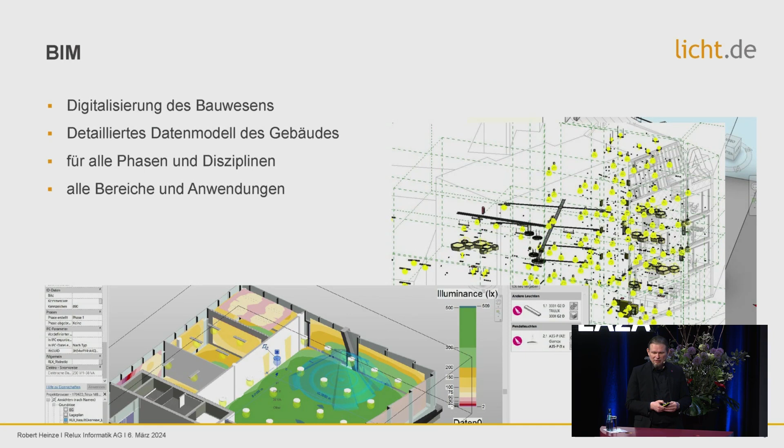So the design process includes many people normally, and they can interact or collaborate with each other in a much better way, or much easier. So this is the theory behind it, but practical examples have shown that it actually works. Communication stays the same. BIM is not something that replaces communication between people. We need to talk about the plan, the design in general, but we've got more sophisticated tools for the design process than we had 20 years ago.

This is how a BIM process works. There are several standards that describe a BIM process. ISO 19650, for example, and this is the last standard that I would like to mention. But for those of you who want to take a deep dive, feel free to have a look at this standard, because this describes the BIM processes.

The great thing about the processes for the entire design process, not only for lighting design, is that at a very early stage, you have to design the entire design process. This is called EIR, Exchange Information Requirement. This is what it's called in English. And this is something you have to deal with from scratch at the very beginning of a project. You have to talk about this with your clients, with your customers.

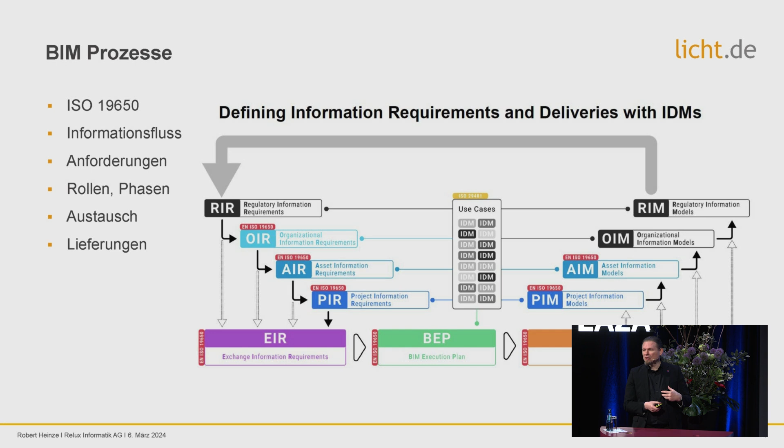What do we want to do? What kind of software are we using? What kind of data format? What are the tasks of the individual trades? And at a very early stage of the design process, this is what has to happen. So you have to think about this, talk about this from a theoretical point of view, but this is part of the practical work today.

GLDF has already gone live, and it was published a couple of years ago already, and gldf.io. The systems that are used today can already read it. You only need to generate one data set per lamp as a manufacturer. So this is a great development. It actually works. And it's great to see that it works. So this gives us the opportunity for a structured data exchange for lights.

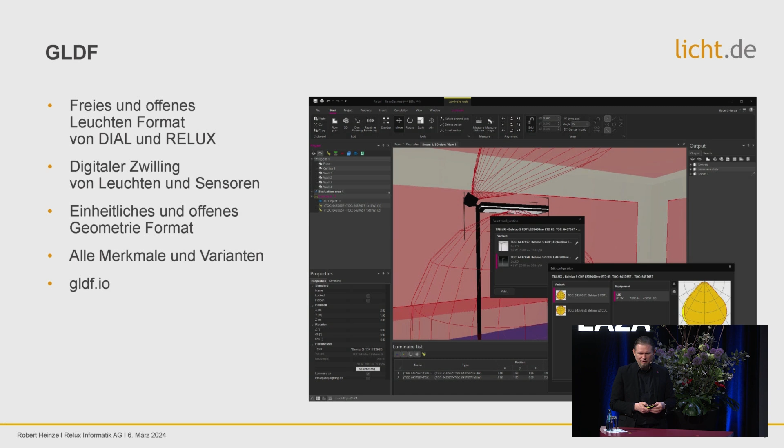For lighting. Lighting is not everything when it comes to a building, but it's one important factor for our industry, of course. Then we deal a lot with renovations at European level. We've got so many old buildings here that we need to renovate, and you should use the main structure of the building. I was a bit skeptical about that. So I wanted to find a way how to use your existing model in your BIM model, in your authoring system.

How can you do that? Do you have to scan the room with your mobile phone, or how does it work? But there are mobile phone scan apps that can really scan the entire room already. So we work with AI systems like the one you can see here from Amrax, which is a young company from Austria.

And they developed a tool using AI pipelines to generate a structural model like you want to have it in your BIM model. So it is not individual vectors. It is walls, windows, doors, chairs, tables as individual data objects. So it generates individual 3D objects of tables and of chairs that you can use as a light designer.

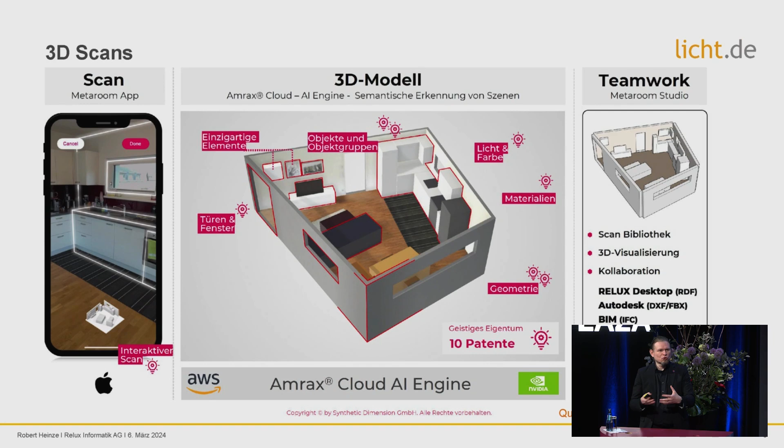You can just, for example, have a look at all the chairs. You can delete them. You can touch them. You can have a look at all the windows, change the properties. And this is a new way of working, which makes the design work pretty easy, pretty simple. And it works better every day. This is what I wanted to show you.

What about BIM lighting design? What about digital lighting design, using a digital data set of a building? We've got different input opportunities on how to generate a data model. IFC, for example, is a great data exchange format which is open and free to use for everybody.

This is great progress, but IFC has some limits because it's a hierarchy without a fixed authoring system. So you don't have a superordinate program, but all the other programs can use it alike. So for a light, for example, you've got a certain photometry, but you only get 48 characteristics in the IFC. A light has up to 500 characteristics or properties to describe it. IFC has some minor gaps or defects that can be compensated with other systems.

And we started in the lighting design with a BIM model, using an authoring system like Revit. We took the data model and transferred it to Relux and our other lighting calculation programs. So the BIM model is transferred to the software that you are using, so you don't have to copy the model again. And this is a huge relief for all the expert planners, for all the designers. You don't have to copy the model.

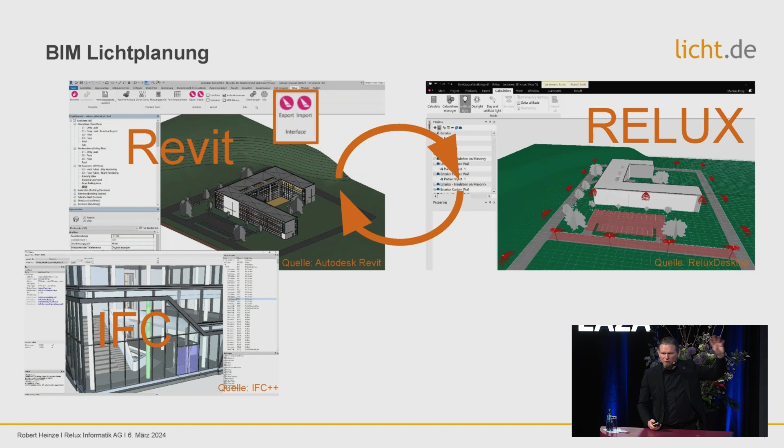And it also works the other way around. You can export it from your design program to the authoring system, and then just add the lights, and you end up with your result integrated in your building model. And it's been working pretty well for years already. This is part of your everyday life. These are our practical use cases. This is state-of-the-art technology, and it works.

What's next? What we have further developed at Relux is the following. We asked ourselves, why do you have to jump back and forth from authoring software to a lighting calculation program? Especially for electrical, it would be much easier if they could do their lighting design in the authoring system, for example, in Revit. So we developed a plug-in including all the task areas and measuring points, a grid that you can define.

You've got an overview of the room. You've got an efficiency method that you can use to select the right quantities. So everything that you can do in a lighting design program can be done in a BIM authoring system, as you can see here with Revit. So it works pretty well. We've got emergency lighting calculation.

So if you're familiar with Revit and the authoring system in general, if you have your model there, you can continue with your design in there.

If you are not familiar with lighting design, this might be interesting for you as well. For example, for electricians or others who have to deal with lighting design once a year, so they don't have to use two different programs and jump back and forth between Revit and Relux. They can do it all in one system, one software. So this is just one option on how to integrate that.

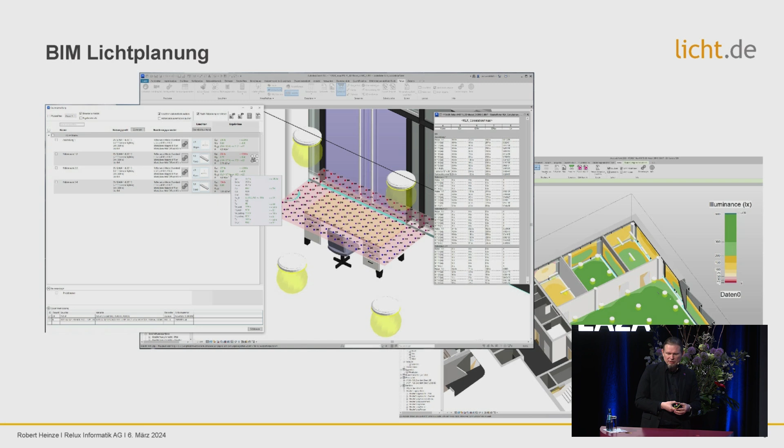But it depends on what you want to do, or what system you're using. If you don't have Revit, if you don't have any Revit models, then it doesn't make sense to just set up a Revit model for lighting design. So this has to do with communication, interaction between the different trades. They have to work hand in hand throughout the entire design process.

If you start as an electrician setting up a Revit model, a BIM model, just to do your lighting design, then this means more effort for you than just using a standard lighting design program. But this is growing. More and more BIM models are available, also from renovations or from existing old buildings. And this is the way forward - an easy way to exchange data between the trades.

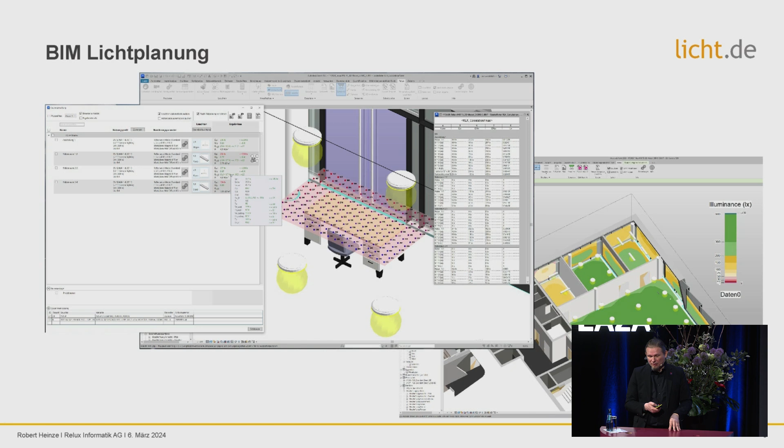Next logic step following digitization is automation. So if you've got everything in digital version - your building, your lights, your tools - the next step would be automation.

It is kind of so you just push a button and then you get all the characteristics, all the features, all the properties from the system.

And if you then realize that it's not compatible with the standard - because this is something you have to check as a human being, like ticking a box - or if you realize that something's in the red and you need to add another light, change the type of light, adjust your measuring grid to make it work, you just have to make sure that you complete several loops before you got a finished lighting design.

Well, as human beings, we are pretty good at it. We don't always take a look at all the characteristics or the most suitable product, but automation is a very good way to ensure this.

Relux published a product for street lighting. This is a bit simpler from a mathematical point of view because you only calculate the direct share, and this is relatively simple - you take into account distances. You can do this based on an Excel file, for example, and the results are identical because mathematically it's pretty simple. For street lighting, you only take into account the direct share.

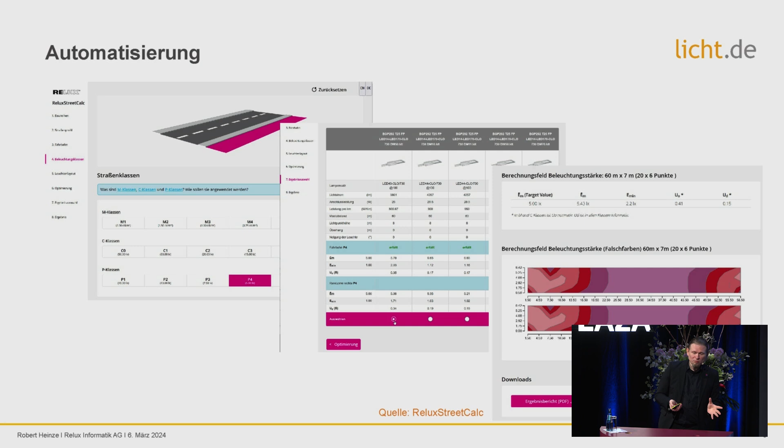So you can adjust a lot when it comes to street lighting. You can adjust the lenses, the light flows. You've got numerous photometric properties, different flows and streams that you can use, and these tools help you find the best suitable lamp or lighting system for your road.

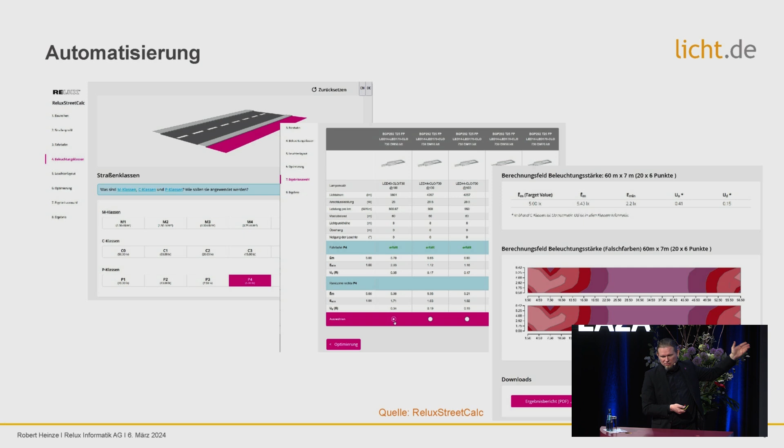Then you have to select the best one amongst the top 5 results, mast distance or clearances between the masts and so on, and you get a photometric proof with all the colors, TI values, and so on and so forth. You can print it easily, and then you're done with your lighting design.

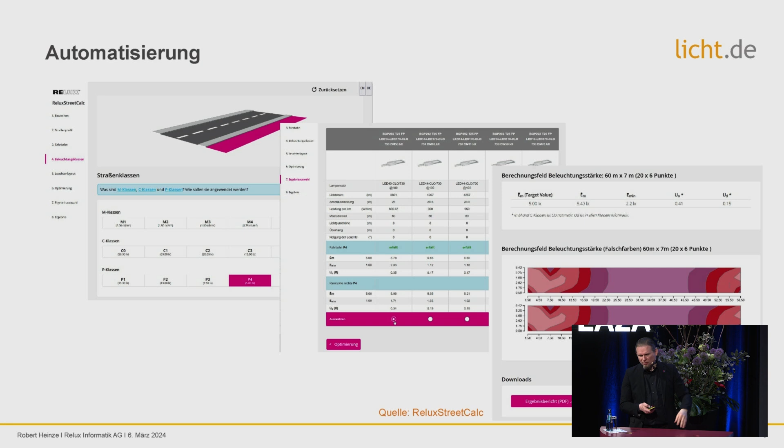So with a small online process, it works very well for street lights. What we are doing at Relux in our labs, we do the same for interior lighting. We developed a product that automatically does the positioning of the lights within a room. We've got an AI module.

This should actually be a video, but it doesn't work, unfortunately. It looks a bit boring, but we've got a module that scans a room and positions hundreds of lights in that room. The quantities and positions are optimized, and then you get a list of results with all the lights that are not compliant with the standard. There are hundreds of lights that work for this room, and hundreds that don't.

So you get a table, a list of lights, and then I can select the most efficient ones. You can sort them, filter them, and take the ones that are most suitable from a quality perspective. You can filter them by certain characteristics or features to really find the most efficient or glare-free solution for your room.

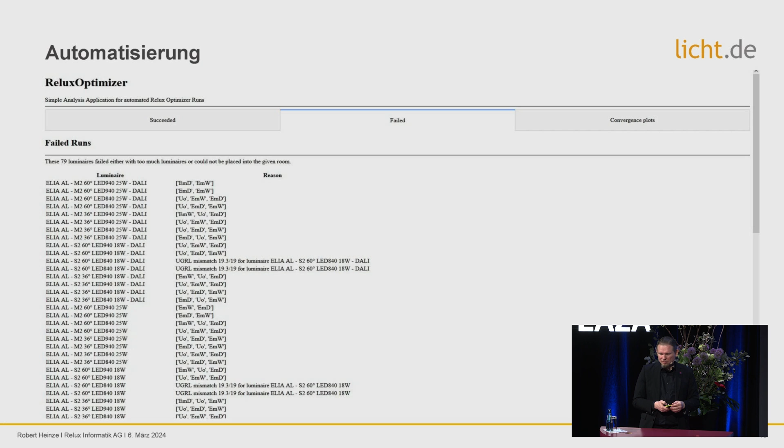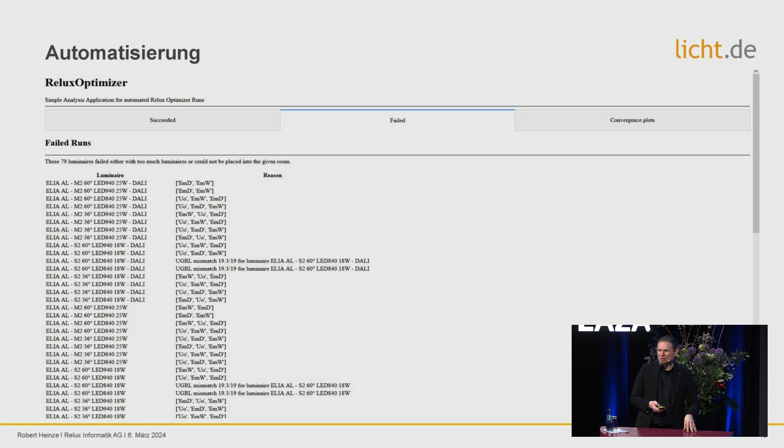And you immediately get the photometric proof for this that you can print right away. So it's also possible for indoor lighting design, and this makes our lives much easier. It's just for standard applications, standard design processes, for ideal light situations. So it only works for standard designs. I have to make this clear again.

Next example, this also works with a great data model. So if you get more and more data from the buildings, from the furniture that's in the building, you can use the data to visualize them, to visualize the building.

For Relux, we call it real-time rendering. Others might call it differently. But this is a module that we built on our own with Enscape, a small company based in Karlsruhe, and they are specialized in BIM models, constructive models that don't look much pretty.

They don't look really pretty. There are no wallpapers, for example, or surfaces, no finishes or finishing touches displayed in the BIM models. It is not a visualization model. It's just a model used for the design process, like a CAD drawing. No wallpapers or colors are included. It's just about the technical properties.

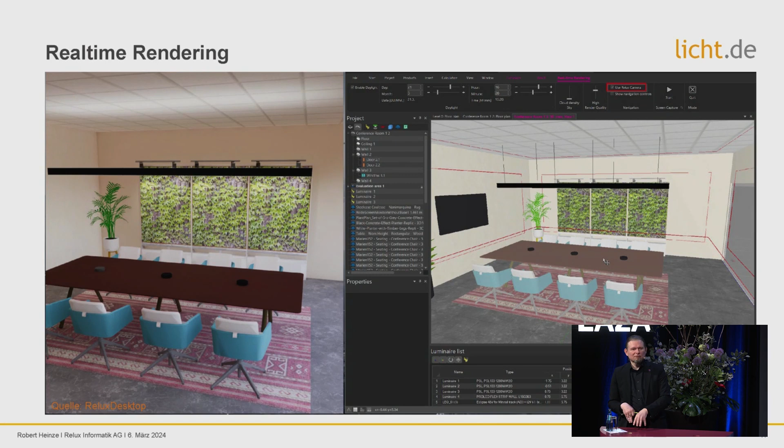Companies like Enscape from Karlsruhe specialize in making these BIM models look more beautiful with very simple tools. By just a push of a button, you can visualize that. And it's a great thing to do. I brought you a video, but unfortunately it doesn't work.

I wanted to show you how the CAD drawing is visualized in that BIM model with this Enscape module. You can really walk through it, and it looks like taken from a game engine. You get all the renderings in real time, right in front of your eye. You can do your own design, position your lights visually with real-time rendering. You can walk through the model, experience it, and have a look at all the rooms, and this is the next level.

And it works pretty well with more data, so with furniture, you can visually, not photorealistic, it looks like a video game actually, walk through the room and see what happens if you sit here. What does it look like if you sit here in this corner? Here you've got a glare effect.

Here you are dazzled, in this corner I want a different color here. As a designer, you can really see the room from a different perspective than it would be possible with a CAD drawing. So this is what we get here if we have more digital data in the planning phase, in the design phase.

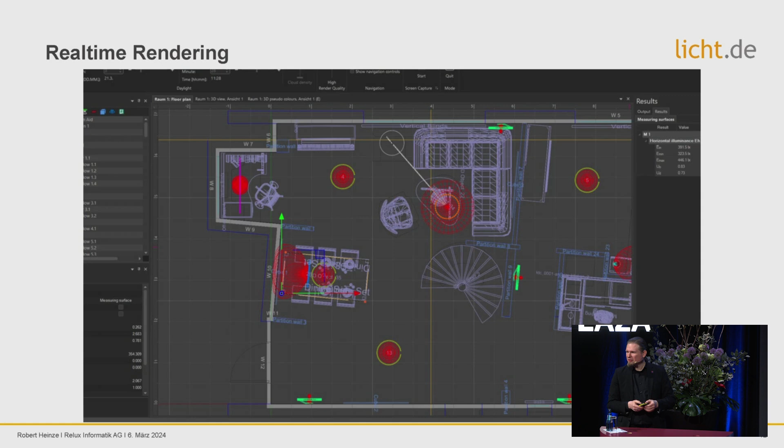So this brings me to the end of my presentation. I've got 30 seconds left because the videos didn't work, but maybe we got some questions. Thank you.